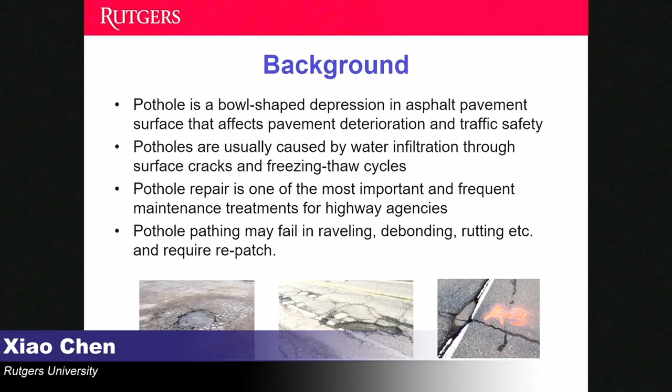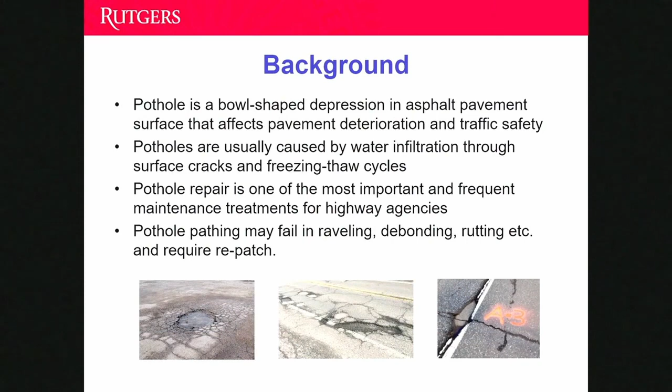As we all know, the pothole is a bowl-shaped depression on the pavement surface that affects pavement deterioration and traffic safety. Especially when driving on the highway, potholes may damage vehicles or make passengers feel uncomfortable. They are usually caused by water infiltration through surface cracks and freeze-thaw cycles. The primary failure modes of asphalt patches include surface rutting, interface debonding, and raveling. Repairing them has been one of the most important and frequent maintenance activities for highway agencies.

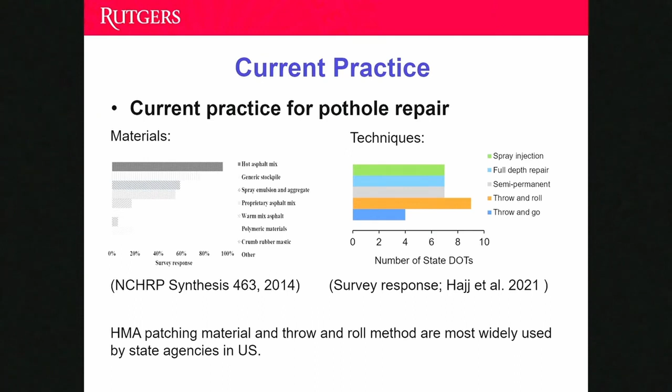Currently, hot mix asphalt is the most widely used patching material, and the throw-and-roll method is the most commonly used procedure. Although some DOTs use spray injection methods, based on our survey responses, cleaning could be an issue for the spray injection equipment, so most DOTs still prefer the throw-and-roll method. They use either the back of a shovel, a steel tamper, or even truck tires to do the compaction.

In our previous work on this project, we evaluated the feasibility of preheating methods in pothole repair, and we proved that preheating can improve the performance of asphalt patches. Therefore, in this study, we are trying to see if we can add recycled material to asphalt patch to achieve environmental benefits. But certainly, RAP material has some durability issues and might be very sensitive to moisture. So we introduce the preheating method here, and we want to see if the combination of RAP and preheating can achieve environmental benefits without significantly impacting the performance of the patch.

This study includes two parts. First is evaluating the performance of HMA with different RAP content through laboratory experiments, then selecting the most appropriate content and adding it to new HMA as patching material for field evaluation. The second part is evaluating the in situ strength of the repaired pothole with the field cores, then quantifying the benefits of this repair quality.

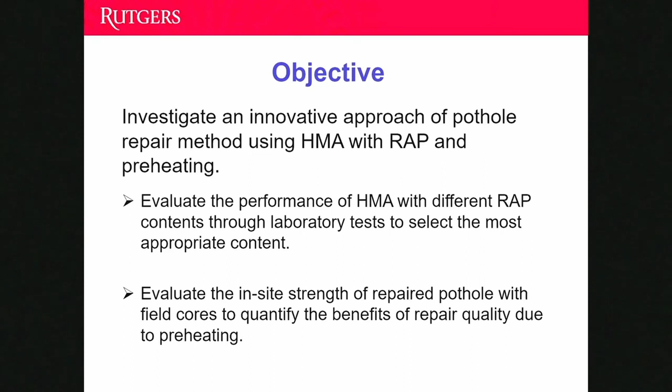Instead of gyratory specimens, we made Marshall specimens because of the large amounts of samples needed and the limited material we have. We made 4 groups of specimens: control HMA, and HMA with 15%, 30%, and 50% RAP.

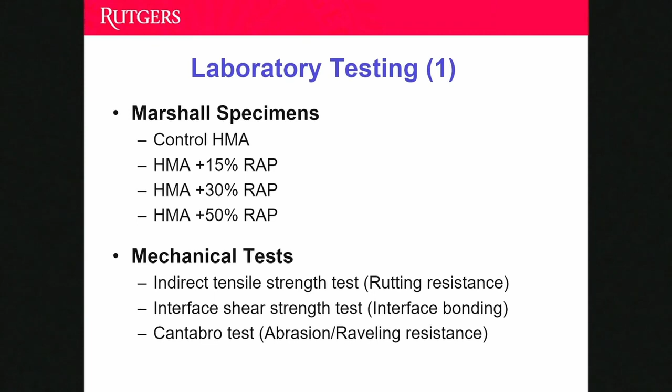We selected 3 different mechanical tests to evaluate the performance of the patching material based on the primary failure modes. We did indirect tensile strength tests to evaluate rutting resistance, interface shear strength tests to evaluate interface bonding condition, and Cantabro tests to evaluate abrasion resistance.

Because the RAP material may have some moisture sensitivity, and based on our survey response water is the main reason for pothole failure, before doing the mechanical testing we put the specimens under 2 different environments related to moisture.

The first is freeze-thaw. We put samples at -20 degrees Celsius for 24 hours, then put them in a water bath at 60 Celsius for another 24 hours, and then we do the test.

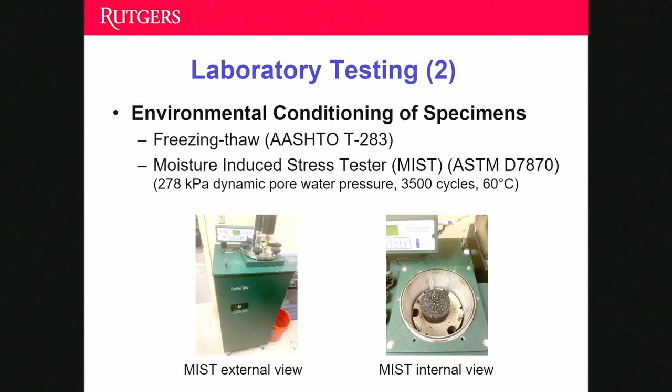The second environmental conditioning is loading dynamic pore water pressure on the specimens using a device called the moisture-induced stress tester, also called MIST. We put the Marshall specimens in a cylindrical chamber, fill it with hot water, and seal it. There's a bladder inside that can inflate and shrink to apply the pore water pressure. Based on the standard, the magnitude of the pressure was around 280 kilopascals, the temperature of the water was 60 degrees C, and we applied 3,500 cycles for each conditioning.

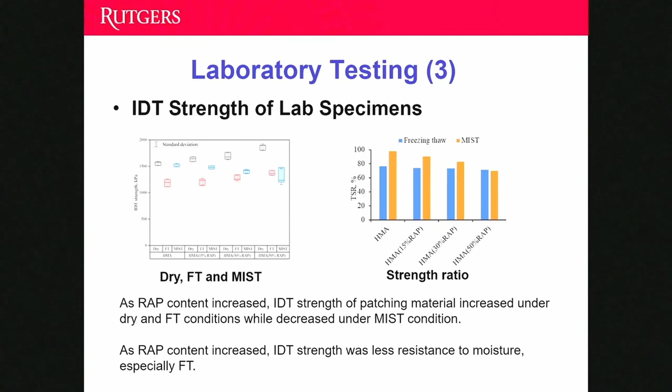From the strength ratio point of view, as the RAP content increased, the IDT strength was less resistant to moisture, especially freezing-thaw.

For the interface shear strength, interestingly, we didn't find a significant impact of the RAP on the interface bonding. We guess the reason is because when mixing the RAP with the new HMA, the actual RAP material distributed exactly on that interface was random and unknown, which could be a possible reason.

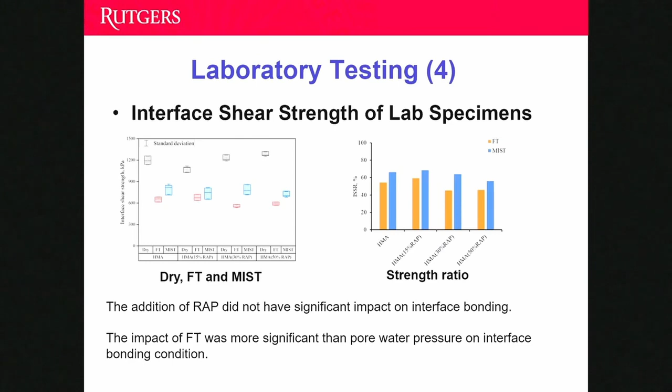Similar to the IDT strength, we found that the impact of freezing-thaw was more significant than pore water pressure on the interface bonding condition.

But different from the IDT and interface condition, we found the mist conditioning had a more significant effect than freezing-thaw on the abrasion loss.

We decided to use 30% RAP for field evaluation because, under freezing-thaw conditioning, the tensile strength ratio value of the HMA with 30% RAP meets the minimum requirement of 70% from the AASHTO standard. Also, under mist conditioning, the tensile strength ratio of this new patching material meets the recommendation of 80% proposed by other researchers. Additionally, the interface bonding condition and the abrasion resistance of this new patching material was close to the HMA without RAP.

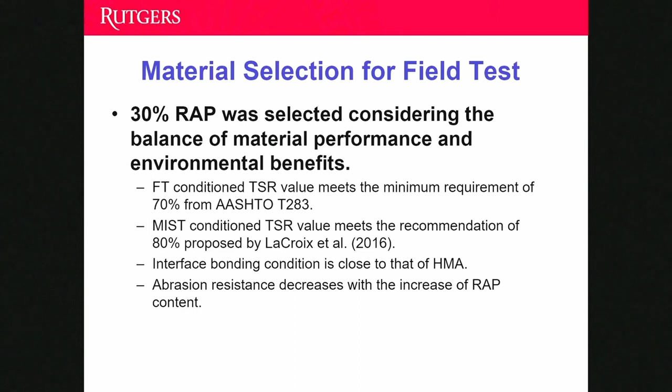So we decided to add 30% RAP to the new HMA as the new patching material for further field evaluation.

In the field, we had a test section at Rutgers campus, built about 2 years ago for this project. The test section was constructed in 2 layers, 3.5 inch plus 2.5 inch, and the construction material was the same as the HMA in our patching material.

We made some artificial potholes during construction. After paving the bottom layer, we put wood blocks on it and directly paved the top layer. After paving, we removed the wood blocks immediately, and after cooling down, we had these artificial potholes.

For each pothole, it was around 30 centimeters long, 13 centimeters wide, and 6.2 centimeters thick.

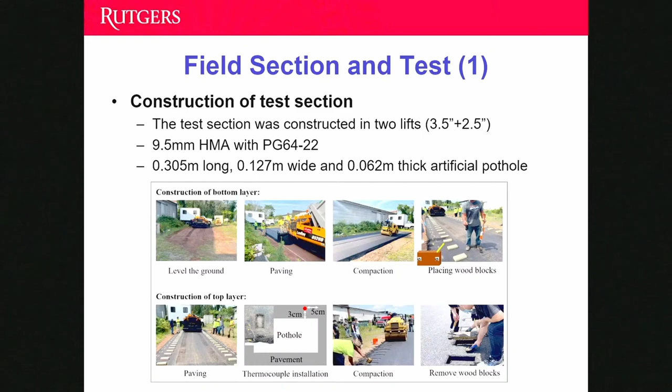Based on our previous study in this project, we evaluated the heating performance, as I just mentioned. Based on those results, we applied 5 minutes of preheating here, using a portable infrared heater with power around 4,300 watts.

If we look at the second picture, after heating for 5 minutes, the temperature at the bottom of the asphalt patch was around 100 degrees C, and the edges were up to 160, which means good heating performance.

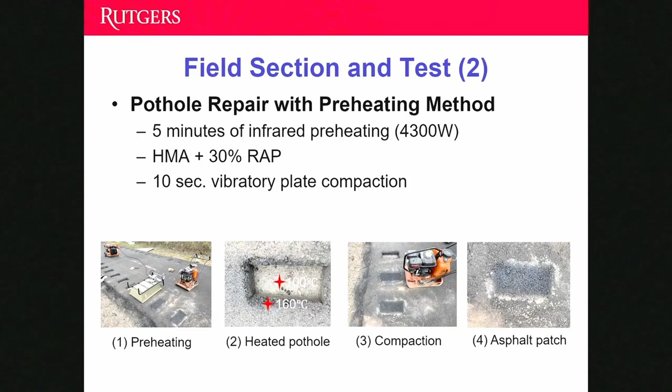Then we did compaction using a vibratory plate compactor for 10 seconds. Initially, we also tried using a steel tamper to do the compaction based on the current standard from NJDOT, but it turned out that we could not get intact field cores because of the torsion from the drilling machine.

We found that the field cores were damaged after drilling, so we think the steel tamper may not ensure good compaction quality. In that case, we could not get field cores for further mechanical testing, so we decided to use the vibratory plate compaction instead.

As shown in the first picture, we took 2 field cores within the asphalt patch area, giving us 2 field cores with the horizontal interface between the patch and the old pavement. We also took another 2 field cores at the edge, giving us 2 field cores with the vertical interface between patching and the old pavement. If we look at the last picture, it shows the patching material with the vertical interface.

Even with the vibratory compaction, we still observed some damage during the drilling. Almost all of the patching material detached from the old pavement at the horizontal interface. So we decided to do the IDT and the Cantabro test on those detached patching material because they are pure patching material, and we did the interface tensile strength on the patching material with the vertical interface.

Based on the previous lab testing, we found that the freeze-thaw conditioning is more critical for IDT and interface condition, and the mist conditioning is more critical for the abrasion resistance. So similarly, in the mechanical testing of the field cores, we applied the freeze-thaw for IDT and the interface, and applied mist conditioning for the Cantabro test.

Here are the results of the IDT strength of field cores. We found that the IDT strength increased under both dry and freeze-thaw conditioning if we applied preheating. This actually verifies the positive effect of the preheating method.

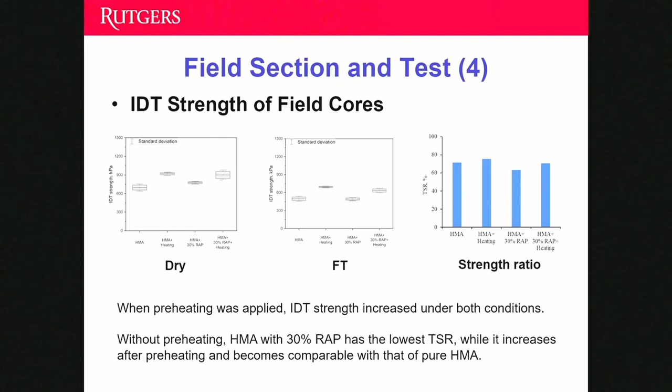Here is the interface tensile strength of field cores. We found that without preheating, the asphalt patching material with RAP material failed after freeze-thaw conditioning - even before we did the mechanical testing, it had failed because of the freeze-thaw. When we applied preheating, the field cores were still intact after freeze-thaw conditioning.

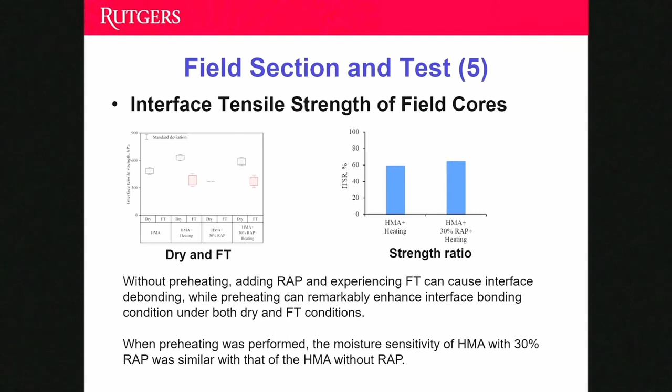We can measure the interface bonding condition, and we found that preheating can enhance the interface bonding condition in both dry and freeze-thaw conditioning. From a strength ratio perspective, when preheating was performed, the moisture sensitivity of this new patching material was similar to that of the HMA without RAP or preheating.

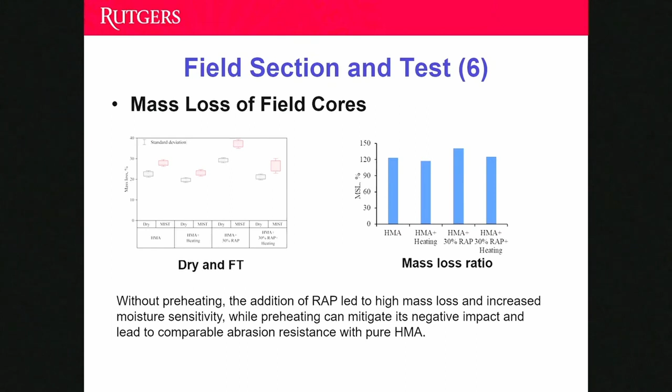Here are the conclusions of this study. From both laboratory and field evaluation in this study, again, we verified the positive effect of the preheating, and we found that preheating can not only enhance the interface bonding condition, but also the cohesive strength of the patching material itself.

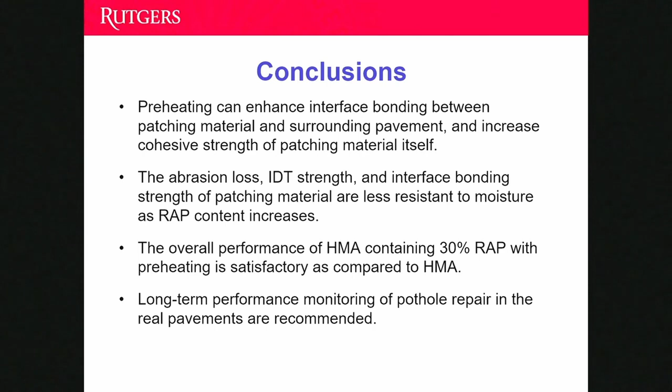Although the abrasion loss, IDT strength, and interface bonding of the patching material was less resistant to moisture as the RAP content increased, after adding 30% RAP, the overall performance is still satisfactory as compared to HMA. This verifies the feasibility of using the combination of RAP material and preheating in asphalt pothole repair without significantly impacting performance. We also think it is necessary to conduct further field evaluation on real in-service pavement using a simple compaction method to validate the findings in this study.

And that's all about my presentation.

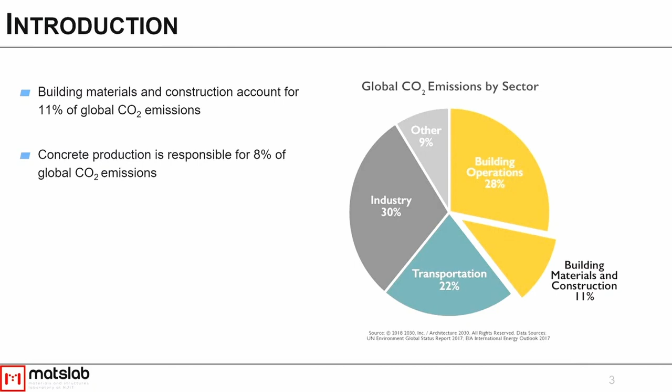So just to set the background, concrete is a large producer of CO2. It has a lot of embodied carbon within it. It's responsible for about 8% of total anthropogenic carbon emissions in the world, compared to the entire building materials and construction sector, which accounts for 11%. So concrete makes up the majority of that. Where is all this coming from? The reality is concrete has a relatively low embodied carbon per unit volume—one cubic meter of concrete has a pretty low embodied carbon compared to one cubic meter of, say, steel.

But the amount of concrete that we make every year is just so massive that it has a really outsized impact on the world. Here in the US, we make over 400 million cubic yards of concrete, which is the equivalent of over 600 Hoover dams being cast every year in the US. So that's just a massive amount of material.

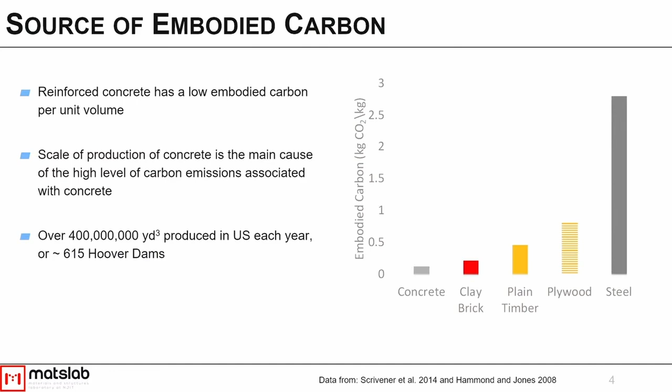And we're not likely to get away from making that much concrete anytime soon. We don't really have a viable replacement material on the near horizon. So we need to figure out how to work with that.

So where within concrete is most of that carbon coming from? Over 90% of it is associated with the production of Portland cement, which is part of the concrete mixture. And when you make Portland cement, you can actually attribute most of the carbon emissions to what we call process emissions, which is part of the chemical changes that happen when you take your raw materials and turn them into cement. The rest of the carbon comes from the process to ship it and grind it, and then the process to heat up your kiln.

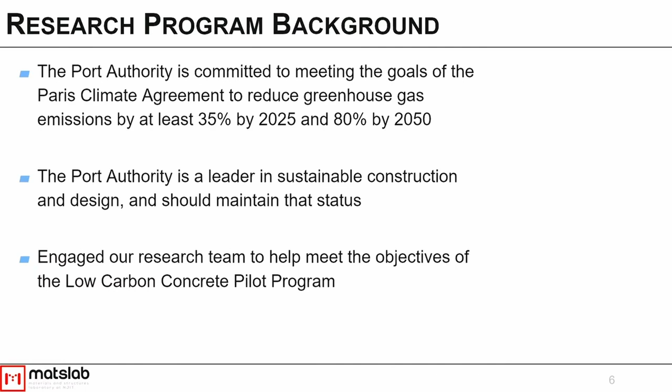So this research was performed for the Port Authority, and they have some really ambitious goals for meeting the Paris Climate Agreements, for reducing their overall greenhouse gas emissions across the agency. This program was focused specifically on concrete, but they are also a national leader in terms of green and sustainable construction. And so we were engaged to help them really define what tools in the concrete mixture toolbox they wanted to use and focus on moving forward.

So this project originally consisted of 4 main tasks. Task A was to analyze and calculate the current state of embodied carbon in the Port Authority. This is the work that Dr. Wang's group at Rutgers mainly focused on in the initial work. Task B was to develop and propose the concrete mixtures that we should test. Task C was when we actually did the laboratory testing, and Task D is field performance monitoring.

So we're currently starting up Task D, and we're about to cast some field concrete to do long-term monitoring of selected mixtures from Task C. But today I really want to focus on Task B and Task C, so developing the concrete mixtures and the laboratory testing.

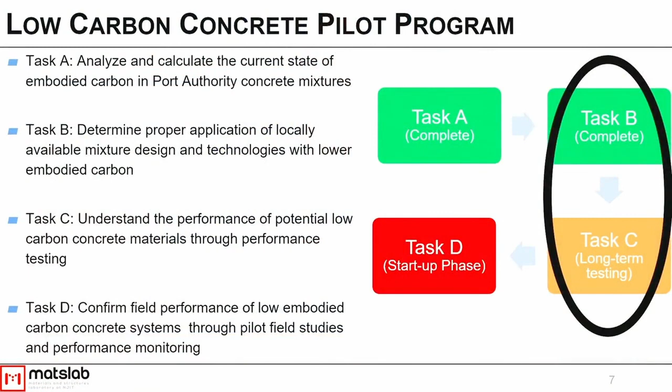So Task B, which was our development phase, had the main objective of proposing 20 low embodied carbon concrete mixtures to the Port Authority that we could use for testing in the lab to see how they could perform in laboratory tests and what their embodied carbon or global warming potential would be. And one of the key parts of this is that technologies really had to be market ready.

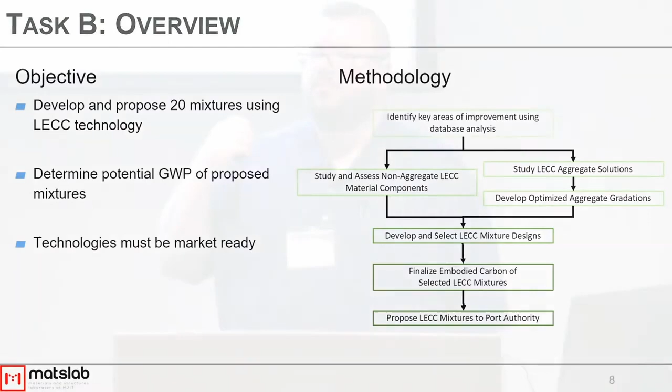There's a lot of great technologies on the horizon coming through research, but so many of them are just in startup phases, not available widely. So we really focused on what can we do today and maybe in the next 5 years rather than what's coming in 10 or 15 years. And so our methodology here was really to focus on the key areas where we can improve based off of the analysis from Task A. From that, we studied ways that we can improve performance using aggregates, and ways that we can improve it using cementitious materials, and then we developed our mixtures and proposed those to the Port Authority.

So we really broke this up into a few groups of technologies. The first group was to focus on supplementary cementitious material usage, so increasing the amount of cement that we are replacing in the mixture with other lower carbon materials. So newer technologies like ground glass pozzolan, trying to understand how Portland limestone cement might affect the system, and then really looking to push the boundaries of how much of these materials we could put into the concrete. We also looked at optimizing our mixtures to reduce the total Portland cement in the mixture, so improving the amount of aggregate in the system, and also looking at CO2 carbonate seeding in the system. And then we also looked at using recycled aggregates as well.

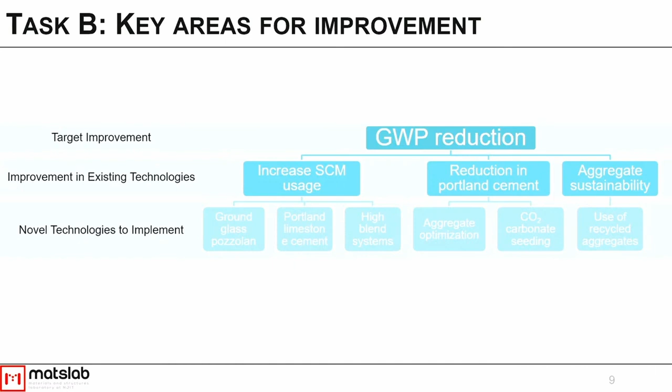From that, we chose some example mixtures that we wanted to keep as our target, and then using our own materials at home, we developed some new mixtures to push that boundary.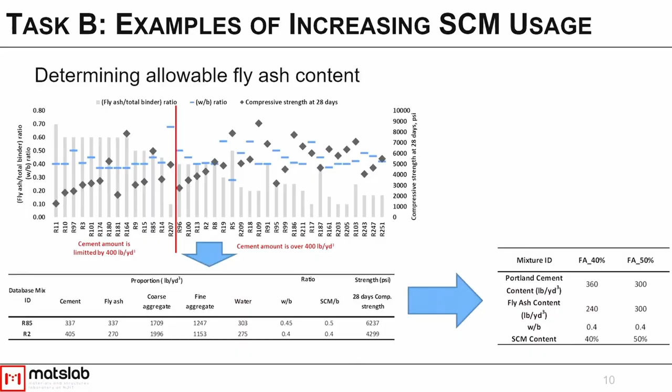When it comes to reducing the total cementitious materials content, we focused on optimizing aggregate gradations through particle packing. This work was mostly done by Dr. Moini's group at Princeton. What we were able to do was take specific aggregates and run testing to figure out the highest percentage of void space we can fill with aggregates before systems become too difficult to work with.

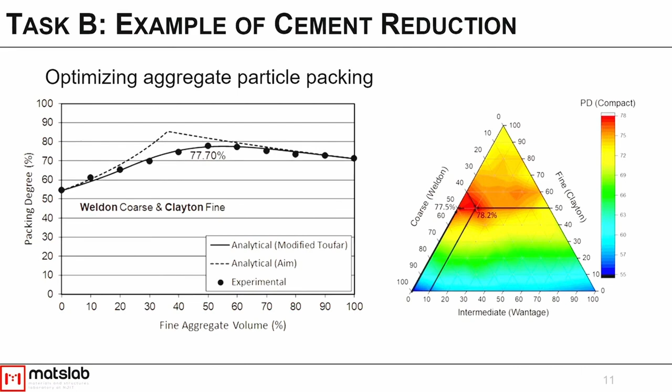For example, these two aggregates, we were able to get 77% void space filling with just two aggregates, but when we moved up and included a third aggregate, we were able to improve that by another 0.5%. That's all space where we were not having to put cement in.

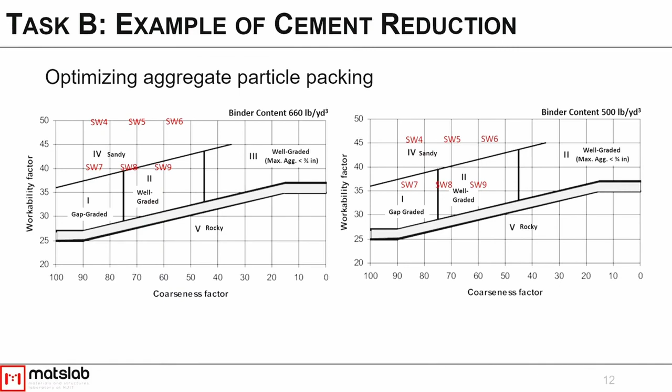We then used coarseness factor charts to determine the workability of the systems with these aggregates, and were able to choose the right blend to increase our total packing without significantly reducing workability. We saw maybe a 5 to 6% increase in total volume of aggregates over standard mixtures already being used, which is quite a bit in terms of reducing cement content.

We were looking at systems with fly ash, with slag, and very high percentages of slag. We actually did some mixes with slag at 77% replacement, ground glass pozzolan, some ternary blend systems using both slag and fly ash, or ground glass pozzolan and slag. They also wanted us to look at some rapid repair systems, so we looked at a CSA as well.

That brought us to task C, where we wanted to study the performance of these mixtures in the laboratory, so that we could assess their suitability for potential use in the field. From this, we could then recommend potential mixtures for the pilot system.

Our process here was to cast our trial mixtures based off of those final mixture designs, or to finalize our mixture designs. We had to do a lot of work with admixture replacement levels and air entrainment levels, because all of that is very finicky—those admixtures depend heavily on temperature and your exact materials, so that took a little while. Once we figured those out, we cast our finalized mixtures.

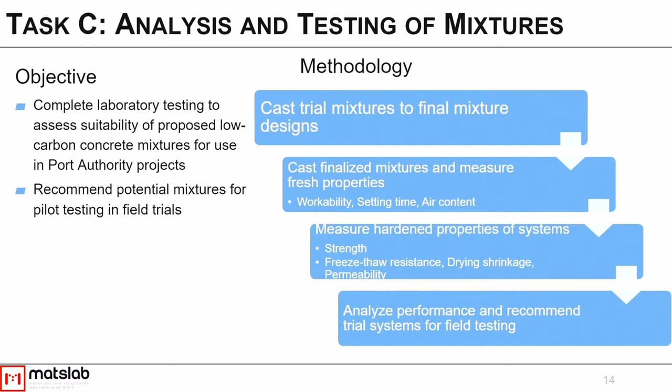This ended up being quite a bit of concrete. We cast probably around 20 cubic feet of concrete in the lab for each one of our mixtures. When you have a concrete mixer that can only mix about 3 cubic feet at a time, this is actually a lot of concrete made in our lab.

Just an example of how we did some of our analysis in terms of how systems performed: this graph shows the initial setting time in green and final setting time in black of the different concrete mixtures. We set upper and lower quality limits, shown by these red lines.

For setting time, our lower quality limit was a 3.5 hour initial setting time—we wanted at least 3.5 hours for initial working time before reaching initial set, where you really couldn't do finishing procedures well anymore. We didn't want final set to happen any longer than 10 hours, preferably lower, but that was the max level we were willing to accept for certain mixtures. For the most part, all of our mixtures met these requirements. Surprisingly, even our 77% slag mixture was well within these requirements, especially for the final set time, despite having our highest amount of SCM, which typically slows down setting.

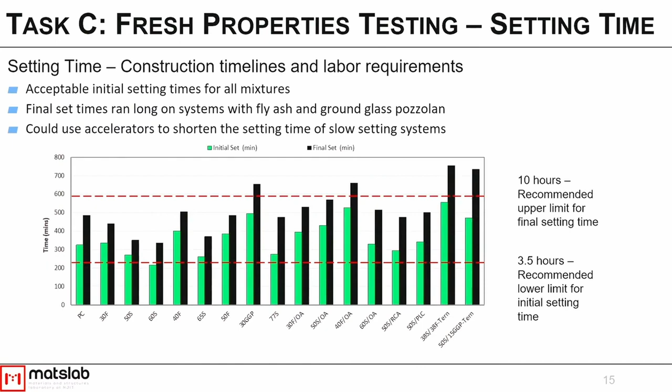But this gives us a good idea of how much working time we'll have in the field, and potentially how long it will take before we can strip molds and start doing other work on the concrete.

Here's an example of our mechanical performance - compressive strength. We looked at compressive strength over 180 days. All of our systems had a minimum of 4,000 PSI, our minimum requirement for strength at 28 days. All of them met that or exceeded it, and in some cases we had 56 and 180-day strengths above 11,000 PSI for a mixture with less than 400 pounds per cubic yard of Portland cement. So we got great strength results out of these systems.

Our biggest issues were with our optimized aggregate systems, and this is a technology we need to dive into a little more to understand how to better design those mixtures in terms of strength. But overall, we did pretty well.

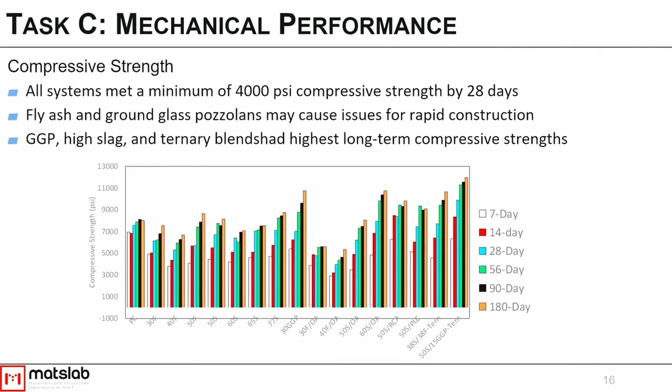We also looked at durability performance, using rapid chloride penetration testing. If you're familiar with that test, you pass a charge through a chunk of concrete, and based on the amount of charge passed, you can get a rough idea of how resistant it is to chlorides moving through it that may cause corrosion. We have a lower quality limit, meaning that to be acceptable, it couldn't pass more than 1,200 coulombs of charge.

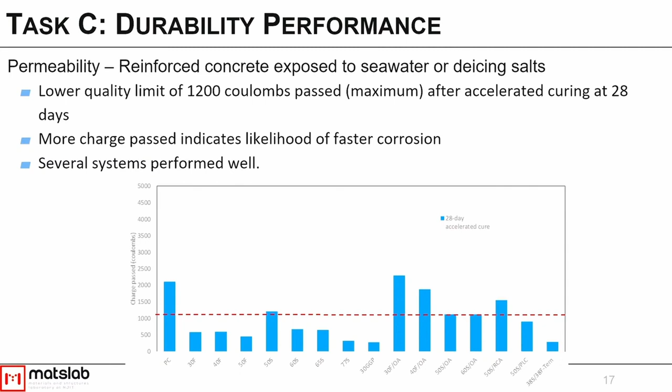This one was not quite as successful with all of our mixtures as some of the others, but we still got fairly good performance across the systems. Typically, when you use supplementary cementitious materials, these will densify the system, so you expect better performance in the rapid chloride penetration test. We sort of expected some of these results, but it was good to get a double check on that.

Our 77% slag mixture, the mixture with the highest amount of SCMs, actually is the only one that met all of the criteria for performance, which was surprising to us because there's traditionally some belief that there are too many challenges when you move that high in terms of strength and setting time, that we wouldn't be able to meet this, but it performed really well.

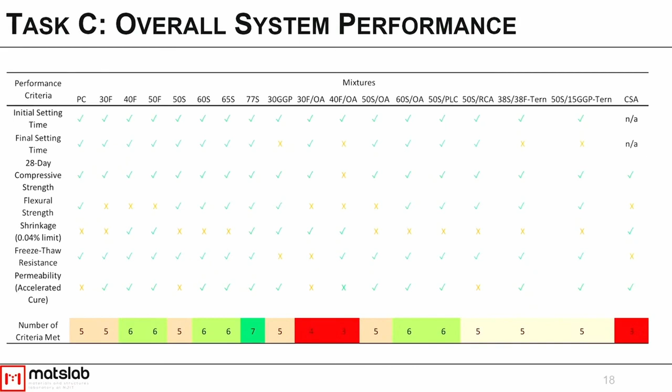We had a number of mixtures that met at least 6 out of the 7 criteria, which gave us our baseline for which mixtures we wanted to start analyzing for field testing. We're still finalizing which ones we want to do, but certainly that 77% slag mixture is going to be in the mix. Our next step is our pilot program.

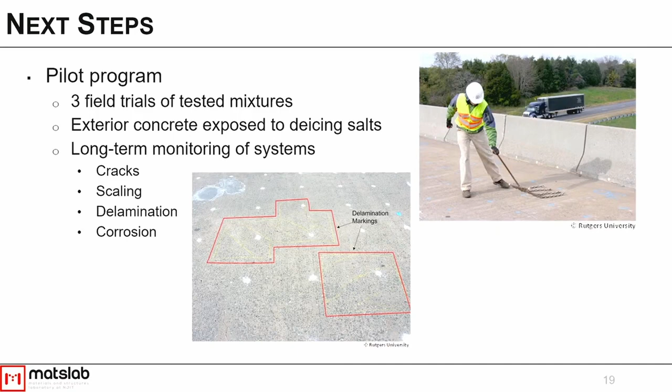We're also going to take companion samples back to the lab from the actual mixes from the concrete trucks and run the same lab tests to make sure that what's coming out of the truck gives us similar performance to what we made in the laboratory. Hopefully we see similar performance in the field as in the laboratory. Of course, scaling up mixtures is a whole new challenge from just developing them in the lab, but we're really excited to see how these low carbon concrete mixtures perform.

For some of the mixtures we're looking at, we're actually reducing the average embodied carbon, or global warming potential, of the concrete over the Port Authority's average by about 50 to 55%. So we're seeing really incredible potential in terms of reducing the carbon emissions for these concrete mixtures.

I just want to acknowledge all of the people that worked on this project. This has been a fairly large project, teaming up with Rutgers and Princeton, the groups who gave us funding for the various parts of this project, and our material suppliers who gave us samples for this. So with that, thank you for listening to my talk, and I'm happy to take any questions.

The test results on high early strength concrete where you're able to strip the forms within like 24 hours and still meet all the criteria, including permeability? So we ran 3-day testing. We didn't do 1-day testing because we were not doing a high early strength process with this. The client was more interested in normal strength concrete. High early strength is a whole other beast that needs to be tackled as well in terms of low carbon emissions, because people tend to boost the cement content to get that high early strength. But that's a whole other research project.

So this is our GWP for our original proposed mixtures. You can see kind of what the GWP might be for the various systems that we did. Yes, so these include some emission costs associated with fly ash and slag.

What we used for that was essentially a cost balance, or profit balance, on those. So if we assume the company makes money off of selling the fly ash, we allocated some of the emissions to the production of the fly ash, which is controversial whether you should do that or not. There's a lot of debate in the field, but we chose to do that. If we didn't do that, the emissions would probably be lower. So this is a more conservative view of the emissions associated with the fly ash and slag.

The third and final presentation of our infrastructure breakout sessions. Today's presenter will be Manuel Celaya, and he is going to be presenting on the rapid assessment of infrastructure using NDT methods. Manuel.

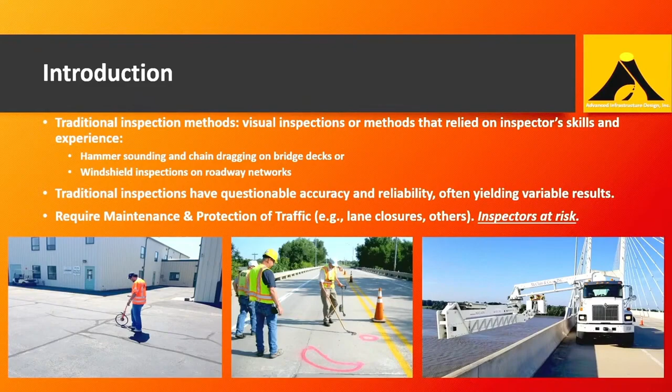The objective is to minimize this risk and also obtain better data from inspections. So we like non-destructive testing methods because they test the material in situ. It is safer because in most cases you need less people on the ground. Many of these inspections can be done with different technologies, safely from inspection vehicles. They can provide a lot better in-depth condition assessment and performance monitoring, and you also reduce dependency on the inspector's judgment or experience.

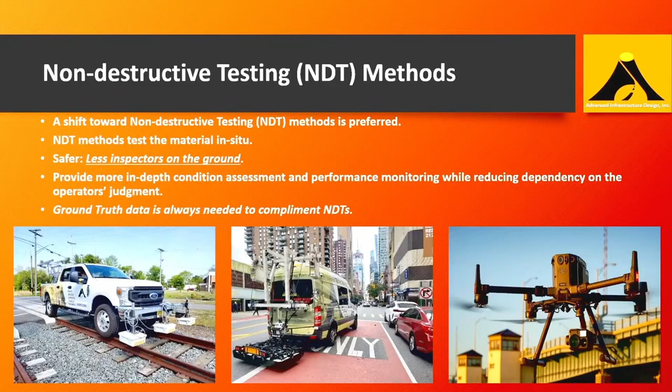Something that I always recommend, even though I've been working with NDTs for many years, is to always include some sort of ground truth testing besides whatever type of technology you use. It's always good to have some comparison with ground truth methods, for example, taking a core if you're measuring pavement thickness, or doing a visual assessment on a limited area instead of a full bridge. I always recommend implementing that besides whatever NDT method you're using.

These are some of the NDT methods that are out there. Some are not state of the art but already state of the practice. I'm naming some that I think are the most valuable and can do rapid assessment of different types of infrastructure. I'll briefly talk about GPR, ground penetrating radar, laser scanner systems, LiDAR, 3D laser cameras for different applications, infrared thermography, and other NDTs like profilers, falling weight deflectometers, skid testing, and seismic ultrasonic testing.

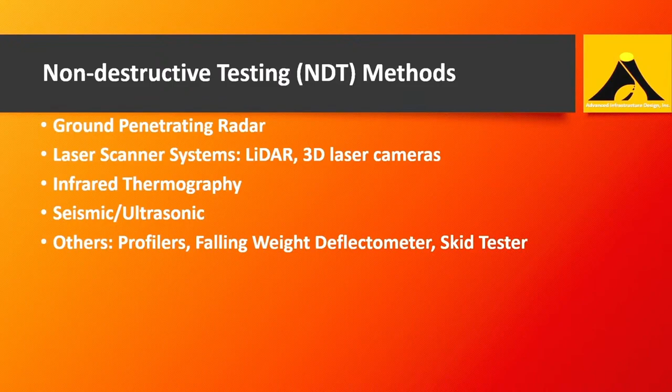GPR is probably the most well-known technology out there for infrastructure assessment. It can provide great coverage area. Usually it's done from a vehicle, so you don't need any MPT because the data is collected at posted speeds. But in some cases, like parking lots or areas with limited access, we still need to use ground coupled GPR, maybe retrofitted on a push cart. We also have the latest advancements, like multi-channel GPR systems, that can also be installed in a vehicle but collect a lot more information. GPR is combined with other technologies to obtain more information and integrate multiple data sources.

GPR is also already covered by a few standards. It's been used for many years, and there are multiple standards for different applications of GPR. We can use it for thickness evaluation, subsurface or utility mapping, bridge deck evaluation, rebar mapping, and changes in construction. There's another application still in the research stage, which is mapping air voids on newly constructed asphalt pavements.

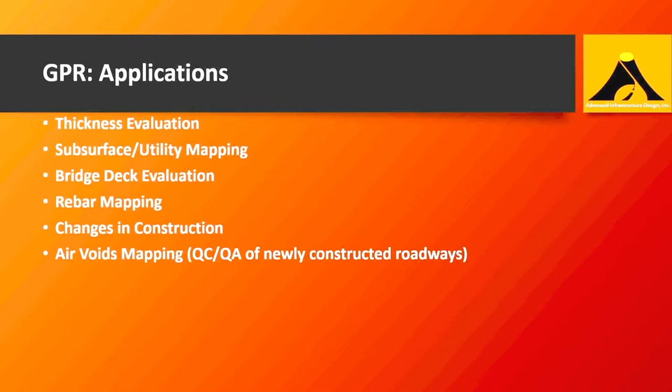For thickness evaluation, we can get with GPR a continuous thickness profile. We can also identify different types of pavement, for example flexible or asphalt pavement compared to composite, which is asphalt on top of concrete.

You can scan large networks and present results in a graph fashion. This graph includes a 40-mile segment with 3 lanes and a shoulder, particularly on the Atlantic City Expressway. So on one graph you get a continuous profile of your entire roadway, and the vertical lines represent ground truth cores that were taken on this project.

Because we always collect with GPS coordinates, you can georeference that data and put it on maps like Google Earth. You can color code your data with different colors for different thresholds, and show ground truth samples to compare your data against.

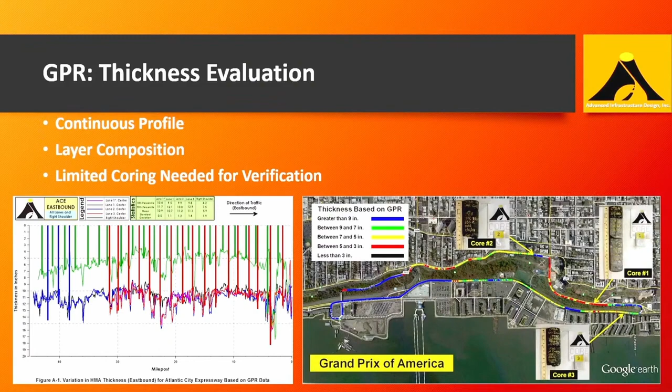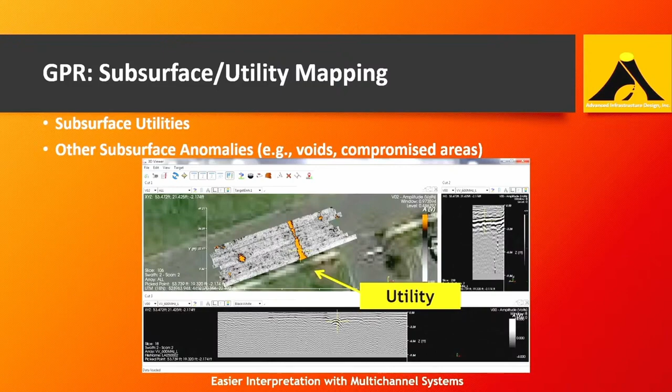GPR has been used a lot for subsurface utility mapping, to identify utilities and subsurface anomalies like potential voids or compromised areas. With multi-channel systems, you can obtain not just single profiles but essentially an X-ray of your roadway, doing tomography from the top, which makes everything easier to interpret and analyze.

So, for example, this is one of the examples you can get with this type of technology, multi-channel GPR systems. Let me see if I can play the video. We're looking at, from the top, like a movie showing the GPR reflection at different depths. As you move from the top, you'll see different utilities crossing transversely and longitudinally, and at some angle they will appear on the video. So this type of result you can obtain with multi-channel GPR systems.

Also, because GPR is always collected with GPS coordinates, we can export all the results georeferenced, like in Google Earth platforms or ArcGIS, or we can export it to AutoCAD and overlay on as-builts.

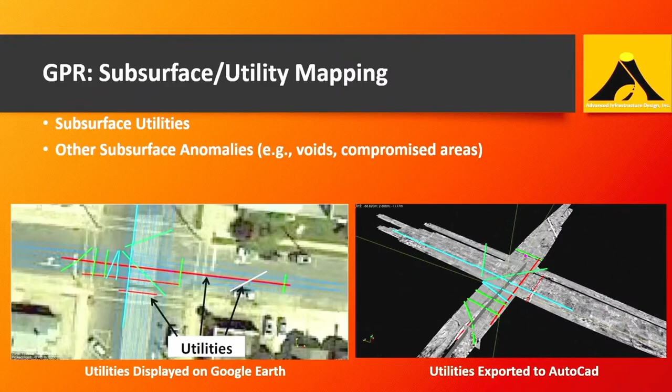It can also be used in forensic investigations, like we've done in a few projects, trying to detect railroad tracks or rail ties under the roadway. GPR is particularly great for that because it reflects all the energy off metal objects, so finding rail tracks buried under pavement is a nice application of GPR.

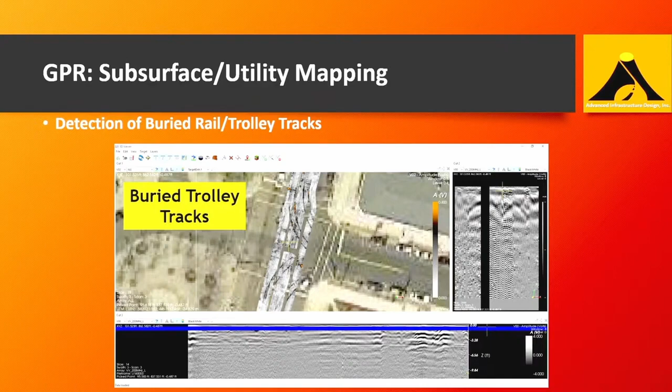It can also be used for bridge deck deterioration mapping, rebar detection, and measuring the rebar cover depth. This is an important feature for bridge deck assessment. The type of result you get from multiple passes of GPR is color coding that lets you differentiate deteriorated areas. You'd put red, usually, for deteriorated areas, and green for areas that don't show any type of deterioration.

So you can pinpoint the areas that need rehabilitation or more in-depth testing - for example, sending a chain drag crew to verify findings on just one area of the bridge. GPR also compares fairly well with other ground truth methods; in this case it was compared with chain drag, and results were pretty much one-to-one.

It's also a very nice tool for identifying rebar in concrete - the alignment, whether vertical or horizontal rebar, and the rebar cover depth. This is particularly useful for cases where we don't have as-builts, like old concrete piers. We've had many projects like that with no as-built, where we had to go and do a complete GPR scan to identify the rebar alignment and depth.

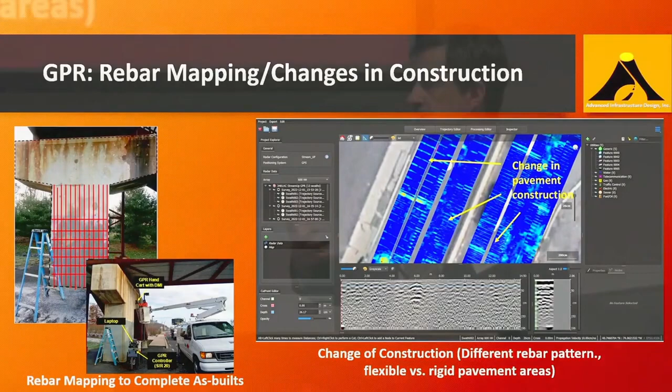It can also be used to identify changes in construction, since steel is a perfect target for GPR - for example, identifying whether you have concrete under your asphalt pavement. With these multi-channel systems, data collection becomes more efficient, so you can scan really large areas in a very small amount of time.

Another type of NDT being used quite often is 3D laser cameras for roadway inspection. These cameras shoot a laser approximately 14 feet wide, and you can collect data at 60 miles an hour, so you don't need any closures or slowdowns on the roadway. What they do is obtain a 3D laser image of your pavement.

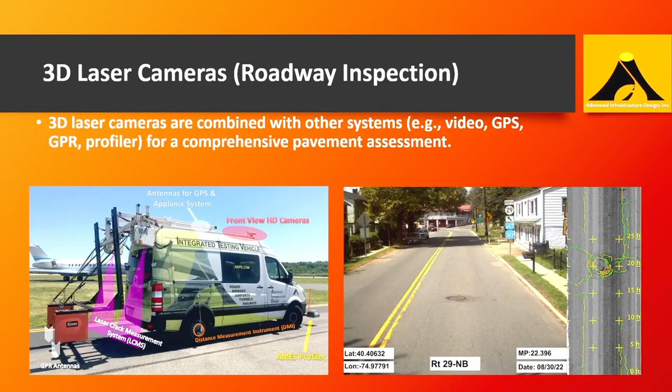With this type of camera and its software, you can also extract surface defects like cracks, patches, and rutting. Usually these cameras are integrated with other systems, like front-view video cameras for right-of-way images of the pavement, and profilers to measure ride quality. We can also integrate these systems with ground-penetrating radar to measure pavement thickness, so with one pass you get a complete picture of the roadway. These 3D laser cameras automatically identify and classify pavement distresses, and this type of system and vehicle is being used by many agencies for roadway assessment.

This is just an example of a recently completed project by AID, this is Middlesex.

So you can scan larger networks and do the analysis in a lot less time compared to before, and you can also color code and try to identify areas that need rehabilitation.

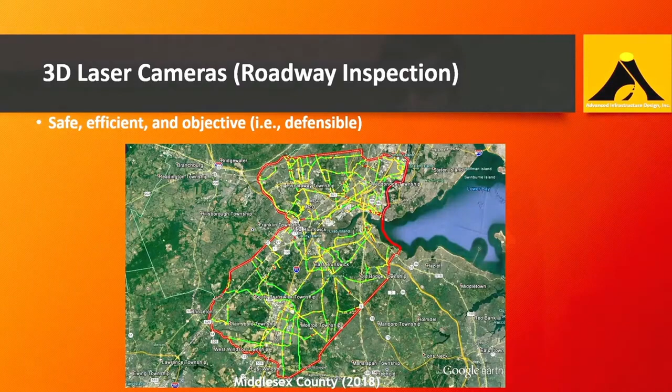And because it's a machine-based system, these types of cameras are safer and more objective compared to, for example, if you had to do the same inspection with engineers just visually assessing the pavement.

This type of camera has another version that is also used for rail inspection. It's the same type of camera, but it goes on a vehicle with rails, and in this case the objective is to measure the rail condition and also the tie condition.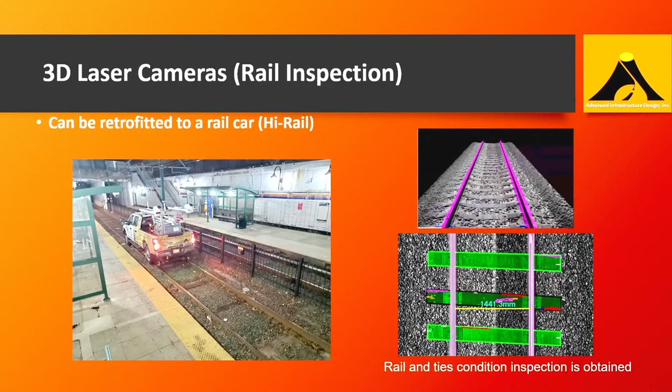There are other types of laser systems. The one I'm showing here is a different type of laser, but instead of shooting laser down, it's like a 360 rotating laser. This is a specific type of device that is for tunnels.

This particular device not only obtains the laser image of a tunnel, but it also includes a thermal camera. So you are collecting at the same time thermal information from the surface of the tunnel and also a laser image of the tunnel. That image can be used to identify all the cracks and surface deficiencies, but with the thermal camera we can also identify other types of deficiencies.

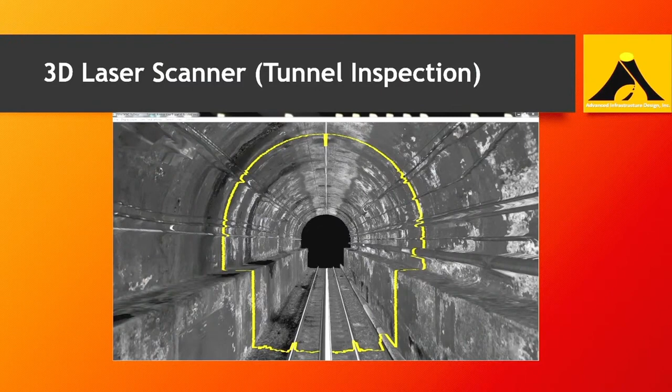This type of system can also provide a visual result of going through the tunnel. It's more like a representation, just to do a walkthrough of the tunnel. It's not being used for analysis, but it gives a very nice representation of your tunnel.

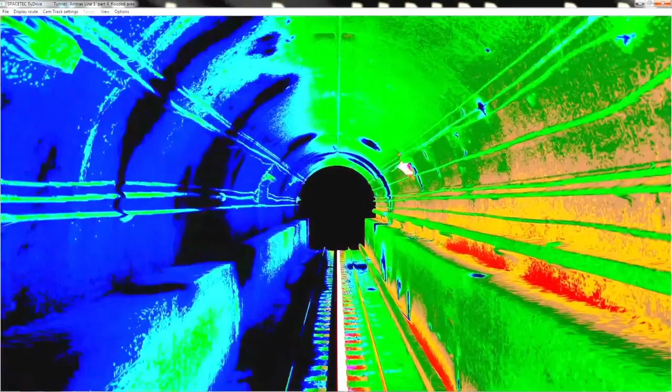The same thing can be done instead with the thermal camera. Visually, you can identify areas that, for example, appear dark blue, which will probably be associated with areas leaking inside your tunnel. So this type of representation and deliverable you can get with this type of system.

This specially designed laser system that is for tunnels, we have also been using on retaining walls. It's the same thing, but instead of looking at the entire profile, we just look at the data that is relevant, which would be the retaining wall itself.

We can combine and look at both the laser image and thermal image at the same time, and identify not only the surface cracks or deficiencies like spalling or rebar exposure, but we can also look at the thermal profile and, like the previous example, identify areas that are actively leaking or areas that are not leaking anymore, where we just have staining on the surface of the wall.

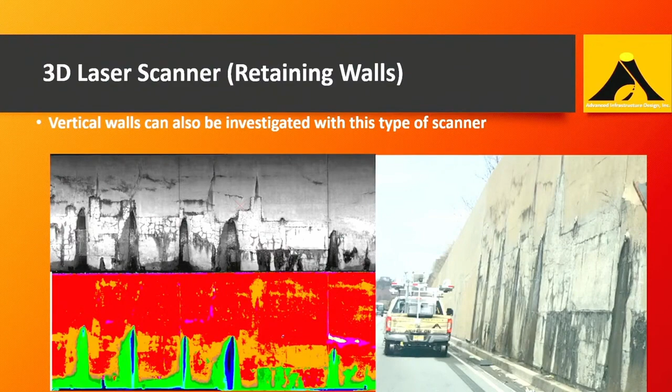Another type of laser technology that probably some of you know is LiDAR. LiDAR is similar to the previous device, but it's less detailed. It collects a smaller number of points, but it's more like a 3D laser.

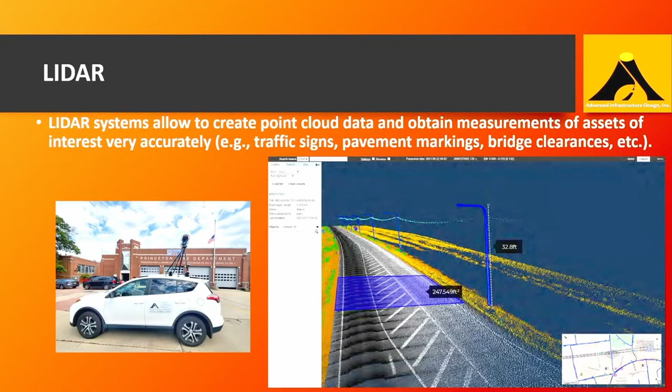This type of laser or LiDAR is used to create a point cloud, and then you can obtain different features, like measuring assets. This is the main objective of LiDAR - measuring assets like traffic signs or markings, or measuring bridge clearance.

Infrared thermography is another rapid NDT technology that is being used quite a bit. It's been used not only for civil engineering applications, but also in medicine, electronics, or mechanical engineering.

Mostly for civil engineering or infrastructure assessment, the objective is to identify defects that we cannot see, like the previous cases I showed with active leak points versus points that don't have any active leaking anymore.

For example, on roadway sections, infrared is useful to identify areas of delamination or debonding. Depending on the time of day, these areas will look either cold or hot compared to the surrounding pavement.

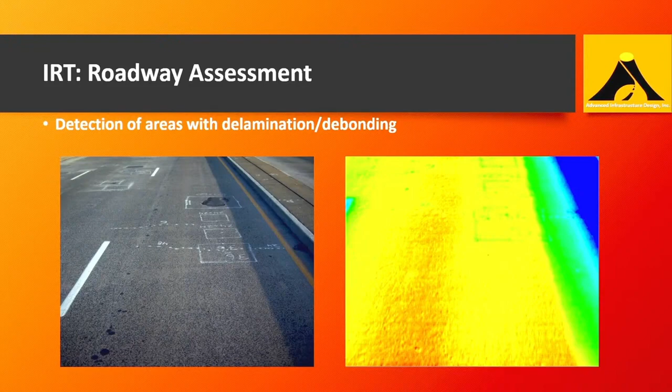In this case it's hard to see, but the areas that were probably previously identified, maybe through visual inspection or some sort of chain drag, are seen as cold spots on the thermal footprint, on the thermal image.

Infrared can be applied for bridge assessment. If you need to inspect bridge elements, usually we install a camera close to the bridge element that we need to inspect, but we don't need to be physically in contact with the bridge. We can set it far away and then identify areas that could be defects.

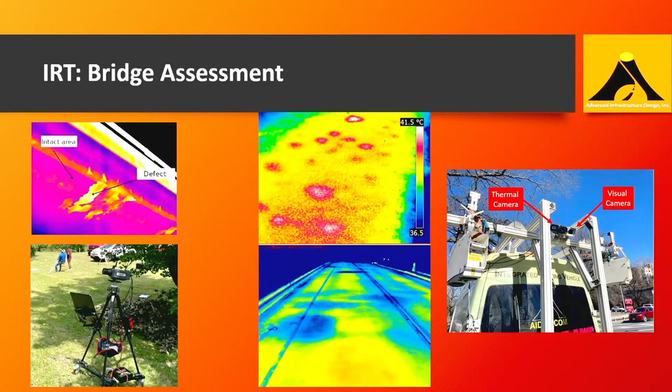Also on the bridge deck, we can put it on a vehicle and obtain data at posted speeds, and like I said before, you can identify areas that have delamination or debonding.

UAVs or drones are also very popular these days because they can combine not only visual cameras, but also integrate thermal cameras. So it's very useful, especially to inspect areas with limited access, like bridge decks or tall bridge decks or the underside of bridges that you would need a UB-50 or UB-60 truck to reach from the top. UAVs or drones are a perfect solution.

Usually this type of testing is done by two people, the pilot and an assistant. For example, in this case we were testing a retaining wall, so the guys were just sitting there, flying the drone back and forth and scanning the entire retaining wall.

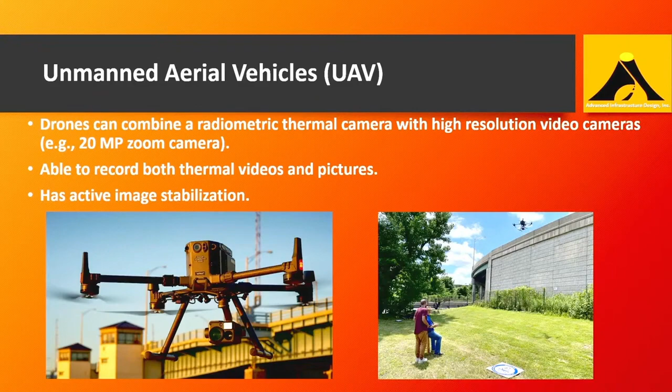Same type of result: you can obtain a high definition image of the surface of the element you are investigating. You can also obtain the corresponding thermal image, and you can identify areas that could be associated with defects that you don't see.

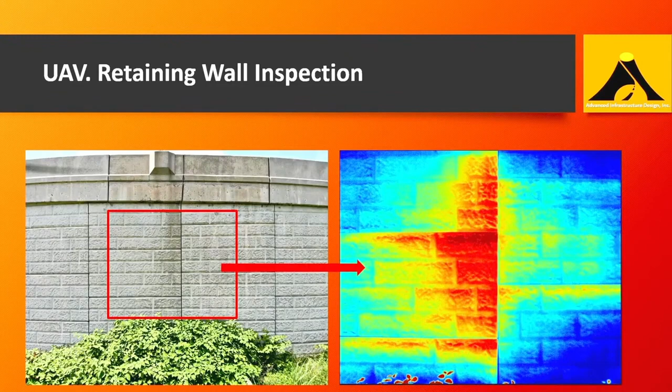It can also be used for a building assessment, same principle, trying to identify either cold spots or hot spots that could be associated with debonding or water infiltration or leaking.

And those are the main GPR, infrared, and laser systems. Those are the main rapid tools for infrastructure assessment. There are other types of NDTs that are also being used that are very relevant, but they might not be as fast, still worth mentioning.

For example, the falling weight deflectometer is used to identify the structural capacity of pavements and the subgrades below, or skid testing devices that are used to measure pavement friction.

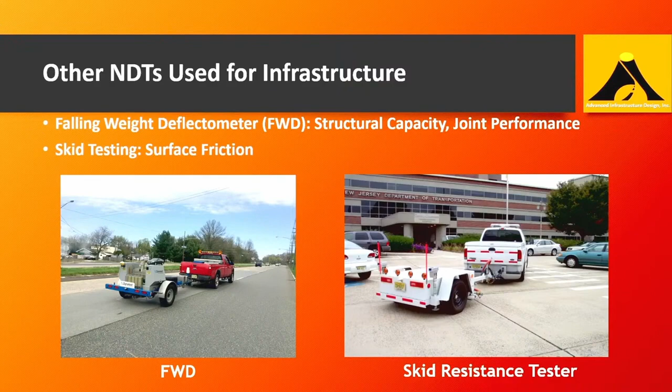Other types of devices are more in-depth and very slow, but they can give you high-quality data on smaller areas.

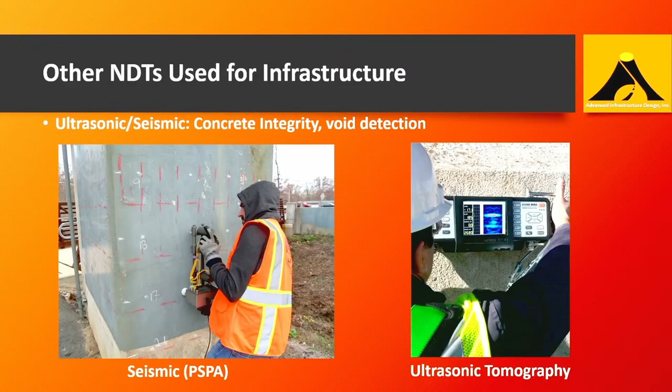For example, seismic devices like the PSPA that I'm showing on the left - we were testing on some concrete piers. Or ultrasonic tomography, which is also used for concrete integrity or to identify voids below the surface.

In summary, NDT methods have a wide range of applications for transportation infrastructure. There are a lot of NDTs that are already state of the practice, but research is always developing new tools, new devices, new methodologies. So there's always more to come, but there are already a lot of tools that can be used for many different applications.

Also, many of these applications already follow many standards. We do all this type of testing according to standards like AASHTO or ASTM. Like I said before, because you don't need to have inspectors on the ground, it's a safer technology compared to traditional methods.

However, it's important to know the limitations of each of the technologies you want to use. You need to know what it is used for and what it is not good for. That is important for selecting the right NDT tool.

And sometimes, a combination of different NDTs gives you the best bang for the buck, because in those integrated testing vehicles, with all those devices combined, you can collect a lot of information in one pass, and it can be done very, very quickly.

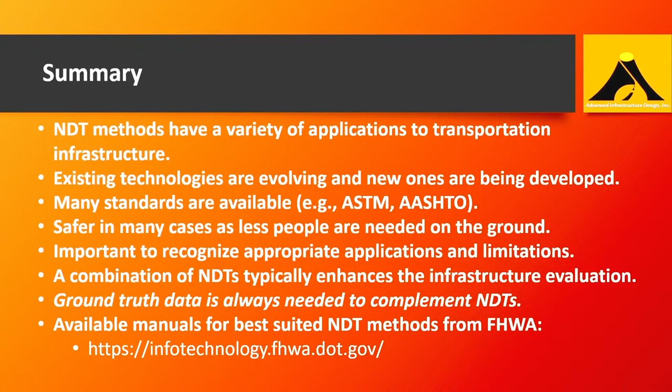There's also a nice web page from FHWA that has manuals and a selection tool based on your need. It will tell you what type of NDT is better suited for your problem. If you are looking, let's say, for pavement thickness, it will tell you that the best NDT you can use is GPR, followed by verification coring on small cases.

And I think that concludes my presentation. Now, if you have any questions, feel free, please.